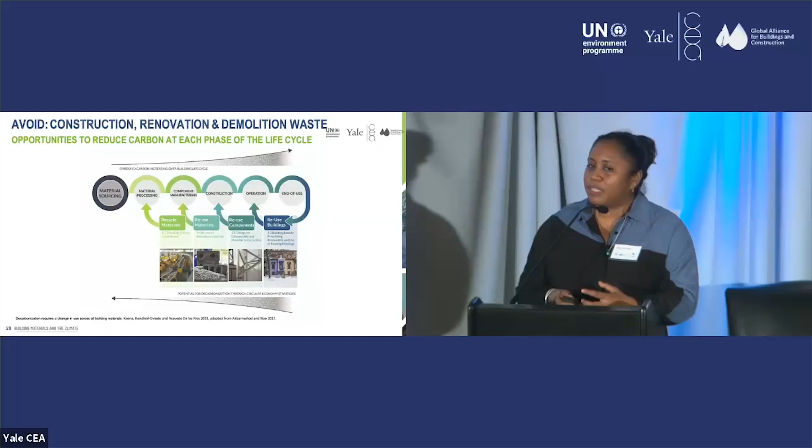With avoid, there's really a massive opportunity to reduce the amount of waste that is coming out of each stage in the building material life cycle. What we know is that on the scale of reuse to recycling, extending the life of our buildings, our components, our building materials are really a top priority before we get down to recycling.

Often, the biggest impact that we can have is right at the beginning when we're planning and designing our buildings. We'll hear from Naomi on the panel shortly about government incentives, economic drivers, and policies that are needed to get a range of stakeholders to promote reuse as a huge thrust of the Building Materials and the Climate report. And design, flexing those design muscles so that our actual identification and love of buildings is the driving force behind promoting their long life. So that connection that we have to our built environment, finding and accelerating and deepening that relationship is key.

One of the most promising shifts outlined in this report is the transition to renewable bio-based materials, which have a tremendous amount of value, like Anna described. They possess a unique dual capacity to be produced at lower carbon footprints, but also through their reductions in driving atmospheric carbon down, not only through their capacity to sequester carbon as they're growing, but to store carbon in their lifetime within the building. Coupling regenerative farming and forestry is key to addressing the carbon impacts of this material economy.

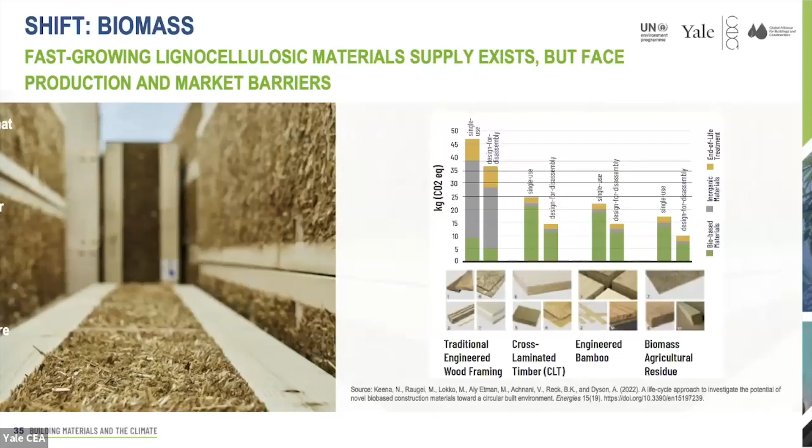Diverse streams of biomass offer a massive supply potential. We produce close to 140 gigatons of these materials from agriculture and forestry every year, and this is a renewable resource. Leading researchers modeling supply of these biomass streams show that supply essentially outweighs demand, particularly in the case of bamboo and straw. But these materials face competing applications and market demand barriers. We'll hear more about that on the panel.

Living biomass, as Anna described, in the form of building-integrated vegetation, offers the potential not just to insulate our buildings and drive down operational carbon, but on the exterior, they have the compounding benefits of dealing with urban stormwater runoff, urban heat mitigation, among others. And on the interior, they're very active in improving indoor air quality and well-being.

While earth masonry has been on the decline since the 20th century, the development of high-quality earth masonry through low-carbon binders, surface treatments, and admixtures, as well as the adoption of local standards, has led to renewed interest in high-quality, localized, and accessible earth masonry across a wide range of climates globally.

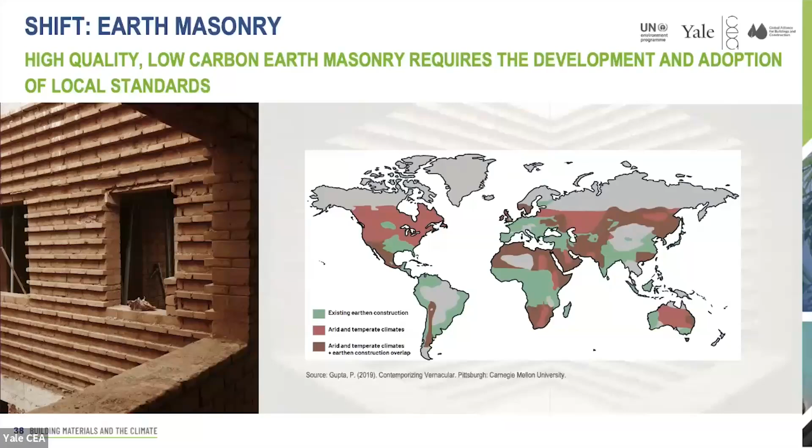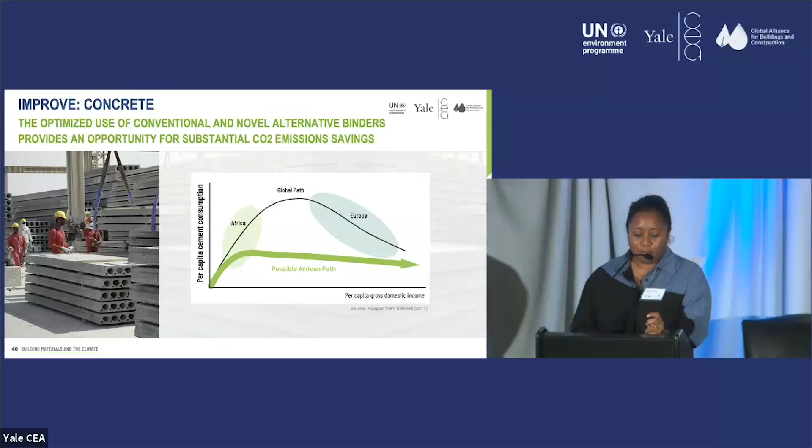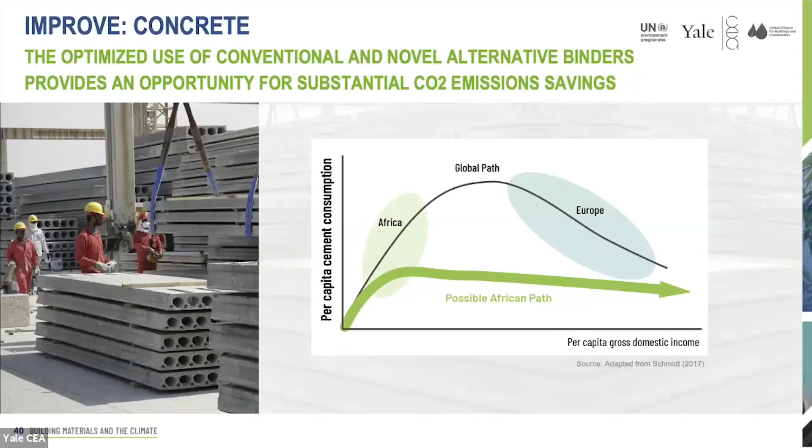As carbon capture and storage technologies begin to scale, the switch to clean sources of primary energy for concrete production is key. Steel is responsible for about 7% of global greenhouse gas emissions, and due to its energy-intensive production, decarbonizing its production through the use of low-carbon electricity and improving the use of recycled steel scrap can save between 60 to 80% of embodied carbon.

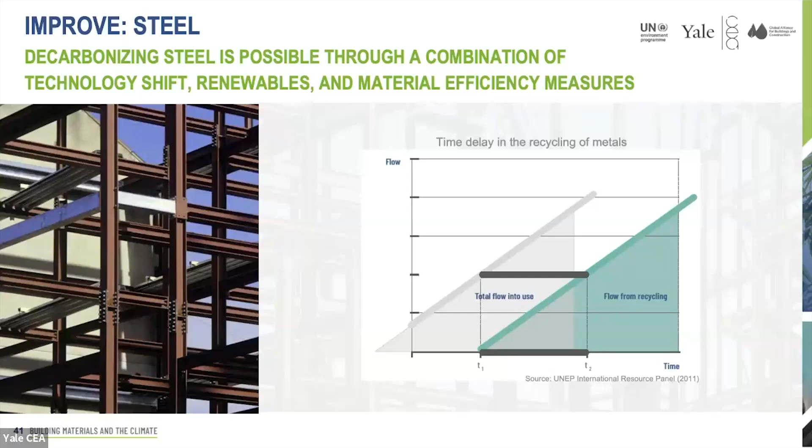Similarly, with aluminum, clean electricity and the recycling of aluminum building materials, which is also on the rise, is an opportunity to even increase that from 70 to 90% in terms of embodied carbon. Plastic use is increasing in piping, windows, and insulation in our buildings.

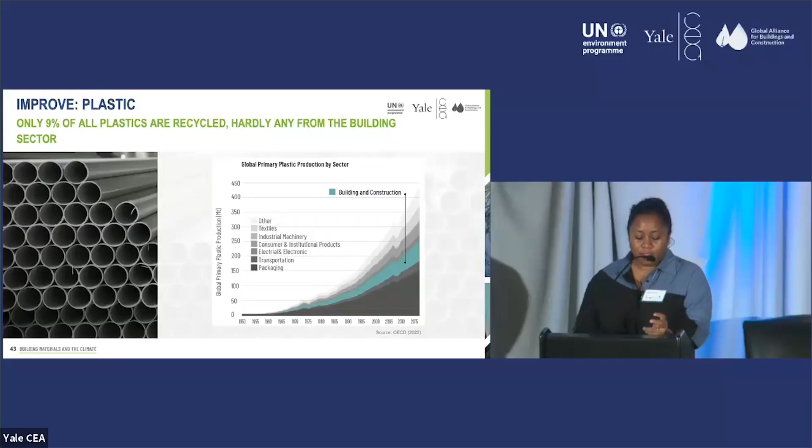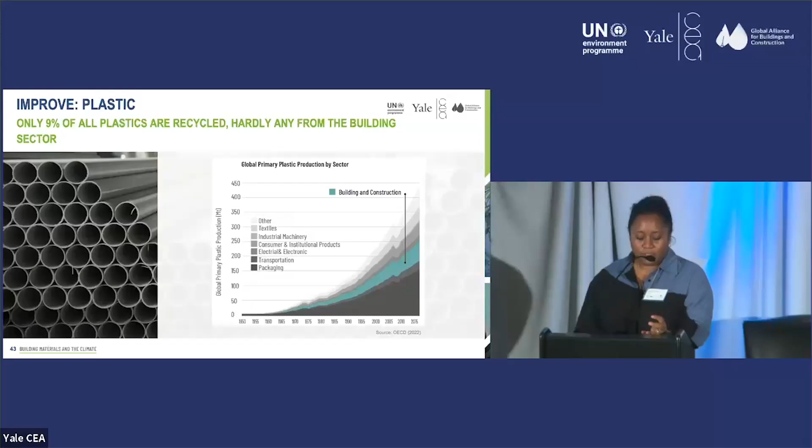Research and development, as well as the scaling of biodegradable plastics that reduce toxic chemicals and the high carbon emissions during production, can offer low-carbon end-of-use or end-of-life pathways like recycling and biodegradability.

Lastly, by taking a whole life cycle approach to glass, this is an opportunity to really address the trade-off in high embodied carbon in modern glazing systems, to drive down operational carbon by expanding their capacity to capture, transform, and distribute energy, and concurrently provide high-quality daylight and electricity in our buildings.

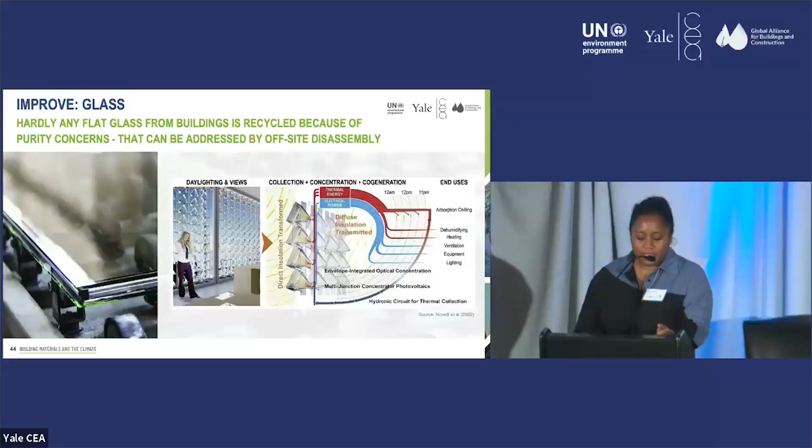It's this paradigm shift, one that rejects the narrow focus on energy at the building boundary that we do today, and the narrow focus on one phase of the material carbon life cycle, and moves towards seeing the built environment as just one stop, but a really integral one, in the global carbon cycle that cuts across both conventional and renewable building materials. So we welcome you to look at the report in much more detail, and I'll pass the mic over now to our panel that is going to take over.

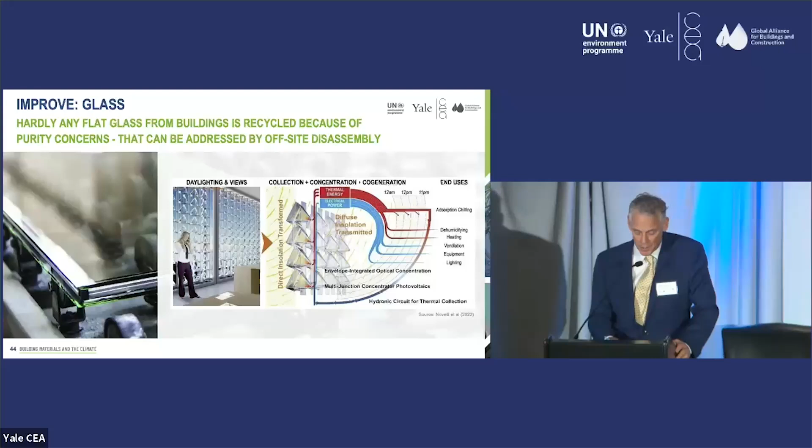I have the privilege this evening of moderating the panel discussion. As we hurtle towards a critical planetary threshold, what scientists describe as a climate tipping point, how can those of us with agency in the conception, organization, and materialization of human settlement mitigate, or better, reverse the ecological and atmospheric impacts of our work? This special UNEP report that we celebrate tonight, Building Materials and Climate, builds upon and consolidates

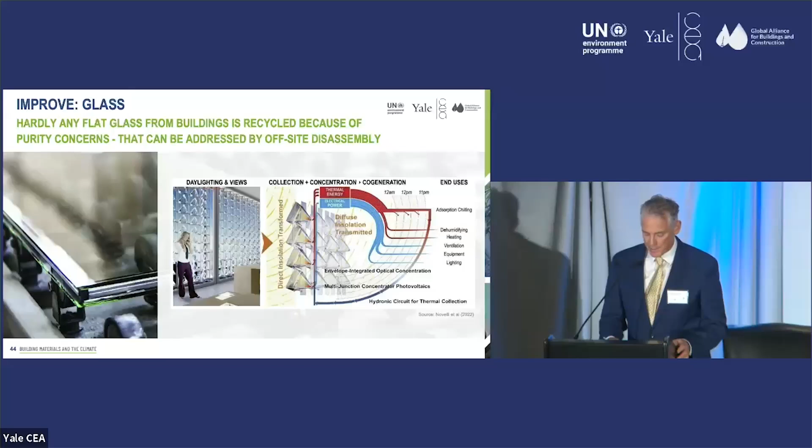the ongoing research and assessments of many of our colleagues distributed across disciplines, geographic regions, and political, economic, and social contexts. The report serves as an acknowledgement of the dynamic flows of material and energy that suffuse the activities of the global building sector. It is, in its essence, a call for system change in the materials and, by extension, the means and methods of the way we construct our built environment.

All this by way of a coordinated, interdisciplinary, transsectoral, and deeply systemic set of interventions. And so this challenge that has been summarized so clearly and eloquently by this report, and that implicates all of us who join here tonight, will be the focus of the conversation we hope to have.